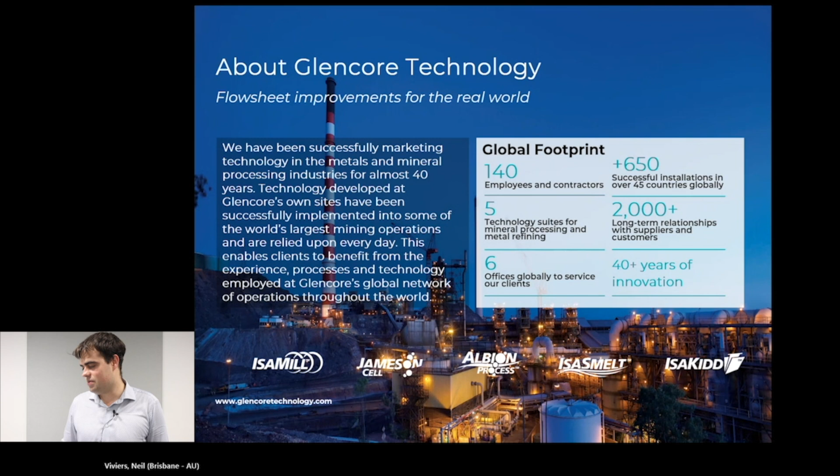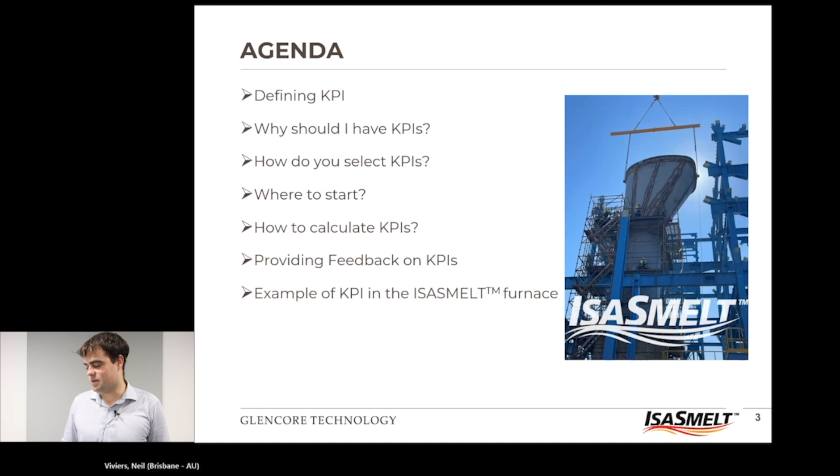Today's webinar, Smelting KPIs, forms part of the ISASMELT technology group. So the agenda for today: we'll delve straight back into basics, defining what a KPI is, why you should have KPIs, how you select these KPIs, where to start, how to calculate these KPIs, and providing feedback on these KPIs, which I think is probably one of the most important and overlooked parameters. We'll give you an example of KPIs in the ISASMELT furnace, and some recommendations and potential pitfalls, where we've seen clients use KPIs suboptimally or even incorrectly. We'll also be answering some questions at the end.

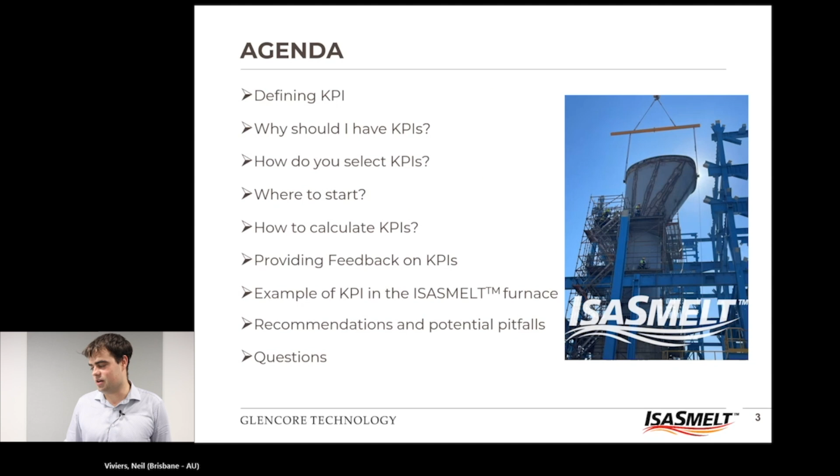You might see the picture here on my right-hand side. This is a picture of an ISASMELT shell for a furnace in Europe, which will start up at the end of the year. We're very excited about that project.

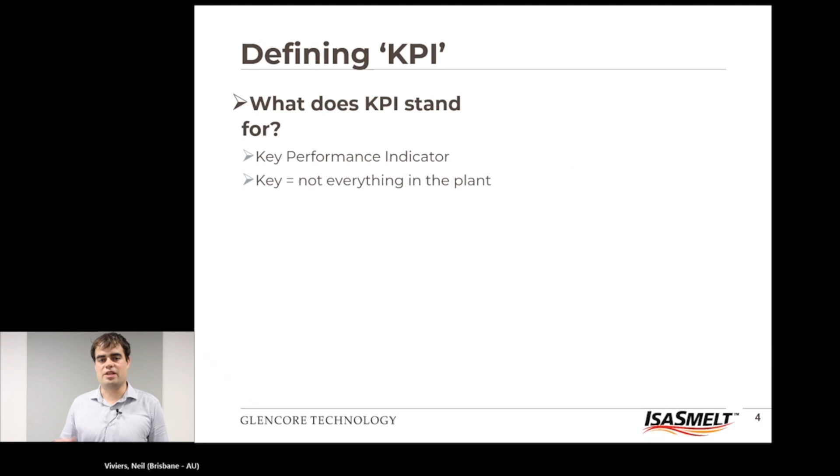All right, so back to basics: defining what KPI stands for. Let's break it down. KPI is Key Performance Indicator. So let's break the words down. Key means not everything in the plant - essentially, it's the key parameters which your plant cannot run without, or runs suboptimally with if they're not in specification. Performance is a certain area that is measured, be it process, safety, or cost. And then the word indicator, which to me is probably the most important word in this - an indicator is indicative of good or bad performance, but it's not an exact or direct measure, and that is very important.

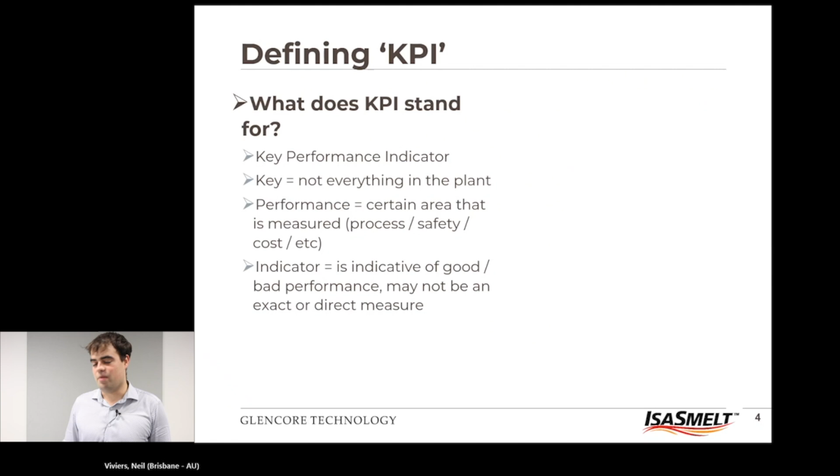To illustrate this, we'll give an example where steady feed grade is an indicator of steady matte grade. But obviously most of you know that you can't have a steady matte grade just with a homogeneous or steady feed - there are many other parameters which can also influence it, where steady feed grade is just one indicator.

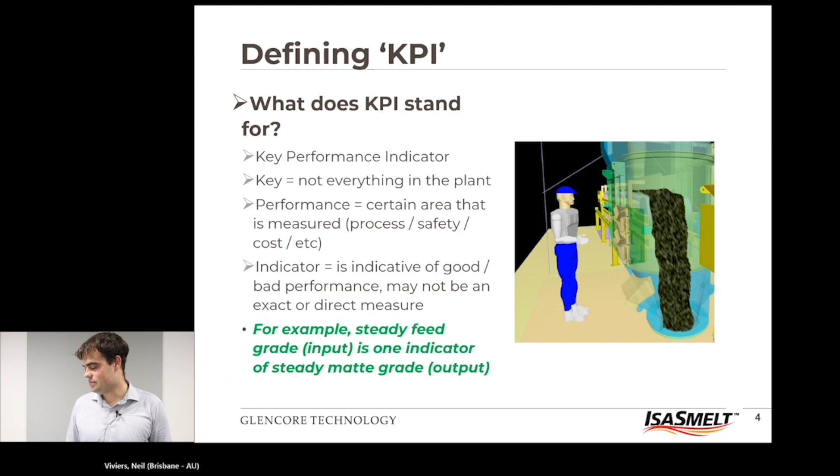So why should you have KPIs? There are certain indicators or data in the plant that give a good indication of the plant operation. However, this requires an in-depth understanding of the plant. For example, experienced metallurgists can come into the plant in the morning, look at a few data points and trends, and tell you the plant's running well, or that we need to look at this or that. Basically that takes a lot of experience, and KPIs can be used as a way to standardize this experience, to make sure everyone is aware of all these KPIs so the furnace can be run optimally at all times.

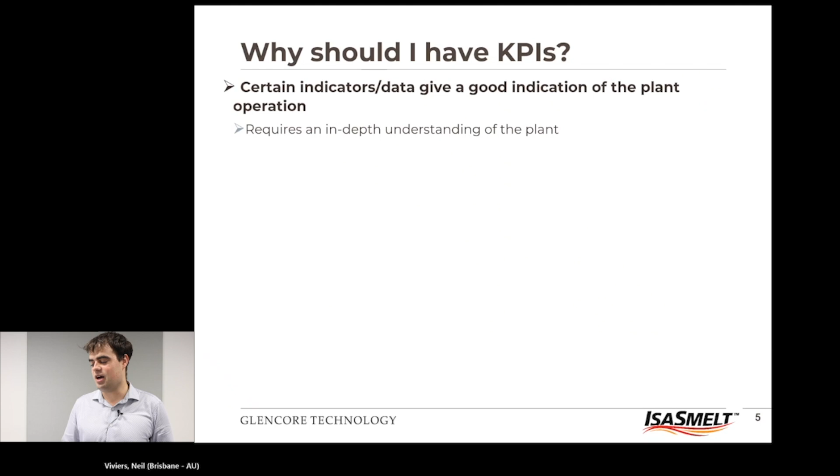These days your DCS systems probably have 100, 200, maybe even 1,000 data points all reporting to your central database, and you can't possibly use them all the time. So you need to prioritize the most important, or key, parameters, and if they're in specification first, you can look at the rest.

KPIs also drive accountability. What I mean by that is numbers are hard to argue with, and it's easy for people to understand. KPIs remove the ambiguity because it's a data-driven approach, which means it's not based on perception, but it's based on an actual number.

So, for example, your tapping floor operator might think the slag is too viscous, but if he's just basing that on his perception rather than some number, the metallurgist will struggle to help solve the issue. Instead, the metallurgist and the tapping floor operator might refer to the tapping time in the ISASMELT, where if the tapping time is too high, it probably means the slag is too viscous, and the metallurgist has some work to do.

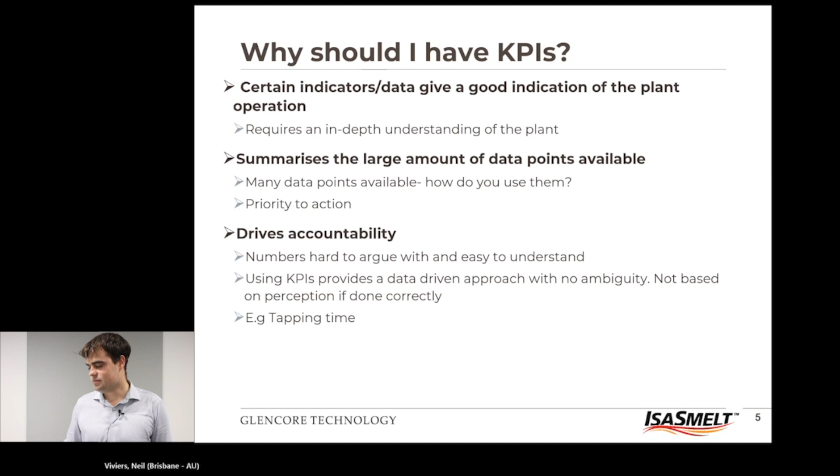KPIs can also be used to drive a data-driven approach to engage your stakeholders. For example, these days smelters can run quite lean crews, especially sometimes on maintenance. And as you know, things keep on breaking in the plant from time to time. So basically having KPIs can help you troubleshoot these issues optimally.

For example, if the metallurgist has shown that all my KPIs are green, meaning in spec, but there's this one KPI, my off-gas sensor gas concentration, that's in red, it could be a process issue, but it can also help you talk to your maintenance teams to say, guys, we need to go fix this issue because everything else is in spec. So it helps you solve the problem more efficiently.

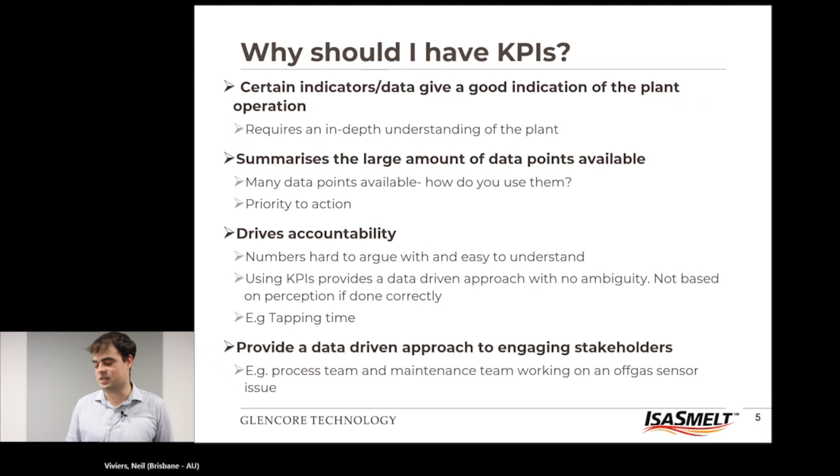So, selecting KPIs. Before we select them, let's give you some characteristics of good KPIs. Good KPIs are understood by everyone, from your tapping floor operator to your general manager in the plant.

Targets are stretched but still achievable. This is really important. For example, if you have a KPI where the target is 5 and the normal range is from 3 to 6, there's no point having the upper and lower control limit from 0 to 10. Why? Because your KPI will always be in specification, and if it's always green, people will start not caring about your KPI and it'll become meaningless.

It's also good if your targets are stretched, as that drives innovation and operational excellence. For example, let's say you've narrowed down your lower and upper control limit, and then in a few months' time you might be able to narrow it down further and further. That can increase productivity and allow you to get more from your smelter operation.

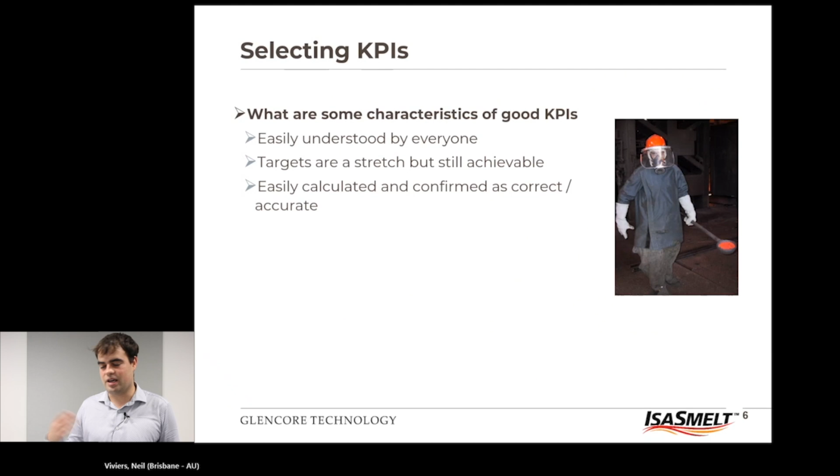Your KPI should be easily calculated and confirmed as correct. As a weird example, you shouldn't be calculating a KPI on a Tuesday different to a Thursday, and you shouldn't one week decide this is how you calculate it, and the next week calculate it differently. It should be consistent. Consistency drives people to buy into your ideas.

It's also important that KPIs drive the right behavior. So, probably a bad KPI, but just to illustrate the example: if you tell your tapping floor operators, I need 12 samples in your 12-hour shift, that's very badly defined, because then they might take 5 samples in the first hour, 4 in the next hour, and the rest in the last hour. Your KPI should rather be take 1 sample every hour, which will promote driving the right behavior.

It's also useful if several items are captured in one KPI, especially at higher levels in your organization. So basically your tapping time can be used to infer whether you have temperature fluctuations, if your furnace is too hot or too cold, and it can also give you insight into viscosity and perhaps even chemistry, and what might need to change.

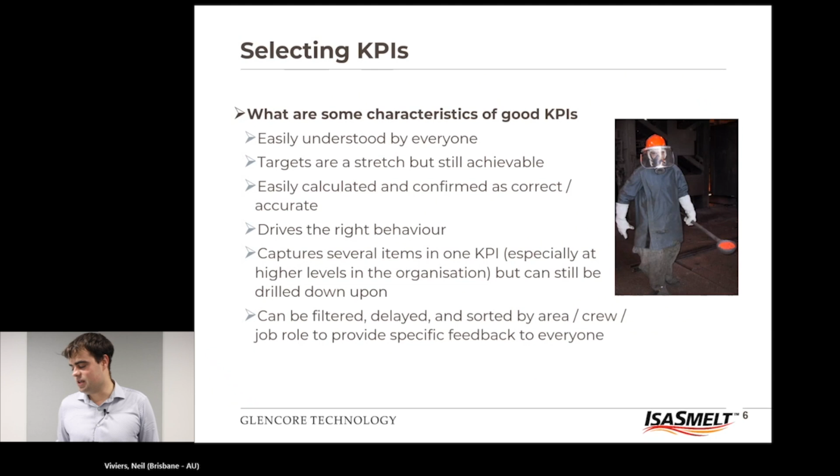It's important that your KPIs can be filtered, delayed, and sorted by crew or area or job role, and that is to be able to give specific feedback to your crews.

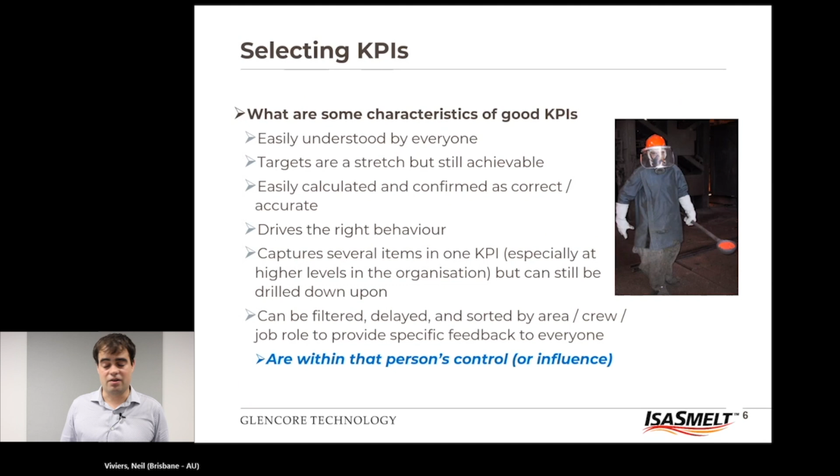I highlighted this in blue because I think it's very important: it's crucial that the KPIs are within the person's control or influence. So again, a tapping floor operator—there's no point in having his KPI be the amount of acid that your acid plant produces, because he has no direct influence over that. If that is his KPI, he will not have buy-in, and he'll feel there's no point in having this KPI, and he might not do the job as well as he can.

So where do you start? Well, it's important to have a solid understanding of the plant or process, and that means understanding the inferred meaning around instrumentation or data.

As artificial intelligence and large language models come into it, that's very important. I heard a story of a consulting firm trying to build an AI model to highlight what KPIs a smelter and acid plant should run at to run optimally. On the first pass, this AI model came up with: if the plant produces more acid, the furnace will run better. Obviously, that doesn't make sense - if your furnace runs well, you produce more sulfuric acid. That's an obvious example, but it illustrates that you need a solid understanding, and you can't make relationships without understanding what's actually behind these KPIs.

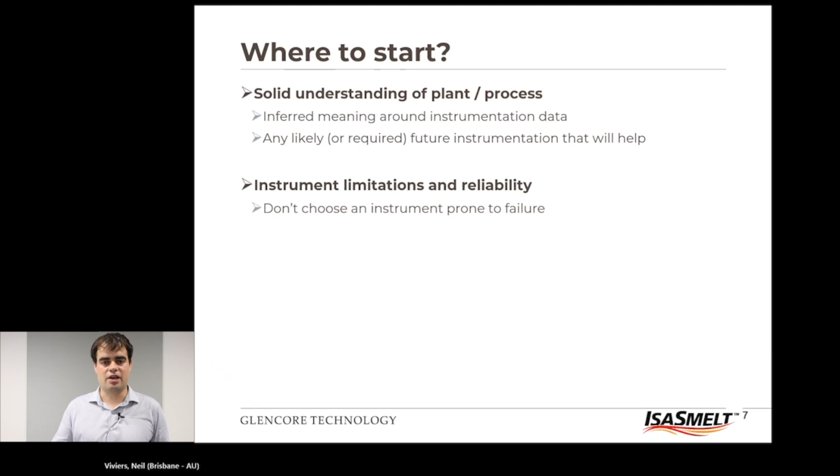Understand your instrument limitations and their reliability. Don't choose an instrument that's prone to failure. For example, if you choose a temperature thermocouple as your KPI - on Monday it's green, in specification. On Tuesday, that instrument fails, so it gets fixed. On Wednesday, it's red, out of spec. Then it's like, well, is the instrument fixed? Is it working or not? You immediately lose credibility in your KPIs if you do that.

It's also important to understand the measuring frequency of your instruments. To give an example, think of your off-gas instrumentation - some of these instruments take an online sample of your gas and give you a result after a few minutes. If that's the case, there's no point measuring this instrument every 1 or 2 minutes for your KPIs, because it won't change. So understand your frequency of measurement.

It's also important to understand the range and sensitivity of the instruments, and this might lead you to think maybe I need a new sensor here, or a sensor with a bigger range. For example, there's no point having your KPI at the upper or lower limit of your instrument range, because then it could flatline and you think, oh great, I'm in spec, or I'm out of spec, but actually you're just out of range of the instrument.

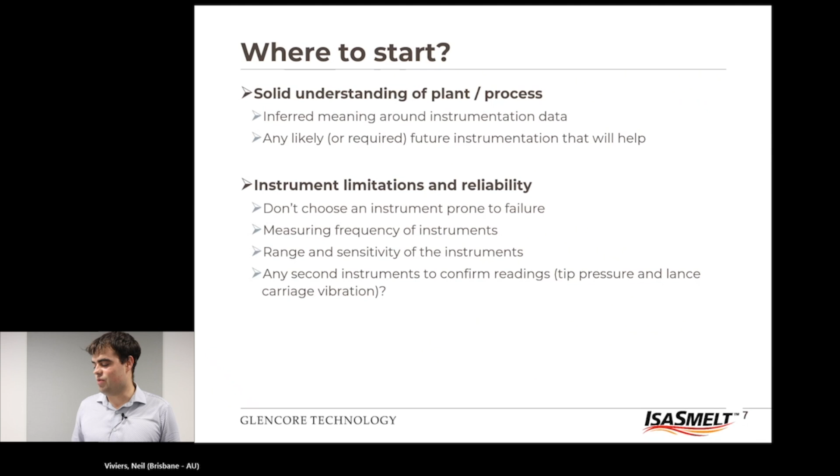It's also quite useful to have second instruments to confirm your readings. For example, in the ISASMELT, you could use your tip pressure and lance carriage vibration to indicate lance immersion. If your lance is deep in the bath, your tip pressure is high and your lance carriage is vibrating, it probably indicates your lance is too deep in the bath. But say your tip pressure is very high, but your lance carriage vibration sensor shows no vibration, and physically you can't see any vibration - that probably means there's something wrong with your tip pressure. By doing that, you build more credibility in your KPIs, because people will know the tip pressure reading is broken, and this is a way for you to verify that and show it in your KPIs.

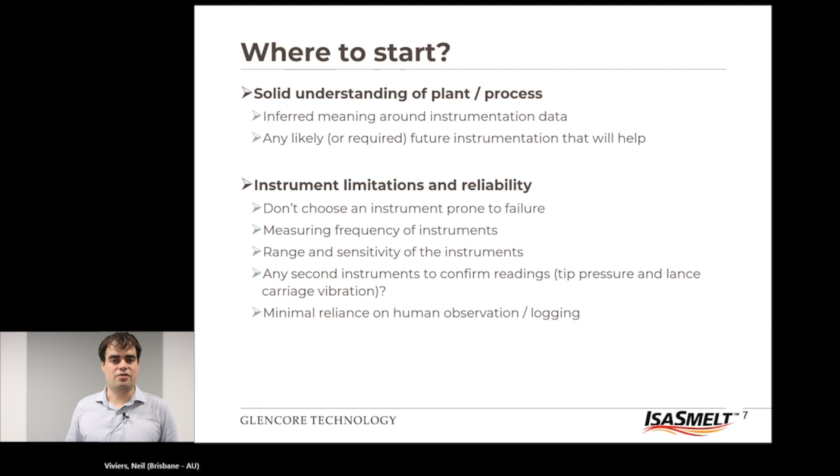It's also important to have minimal reliance on human observation or logging, so that just makes the process more open, fair, and transparent to all individuals involved.

So, calculating your KPIs - larger organizations might have access to a PI system or interface, which is very useful and can calculate your KPIs automatically. I've also seen Microsoft Power BI used as the graphical user interface, which looks quite nice. So if you use a PI system or similar - you load up this dashboard in the morning and it automatically calculates, giving you a very nice set of looking KPIs. For smaller organizations that don't have access to PI, you might have to use your DCS, grab some Excel graphs or something similar, but that can also work quite nicely.

As a side note, this sort of mirrors daily checklists, but you can also use your site procurement register. If you're suddenly using more thermocouples, more Cermets, or more oxylances, it could indicate something wrong in your process, and having that data can tell you quite effectively. Again, it's important to understand your data and how it is collected.

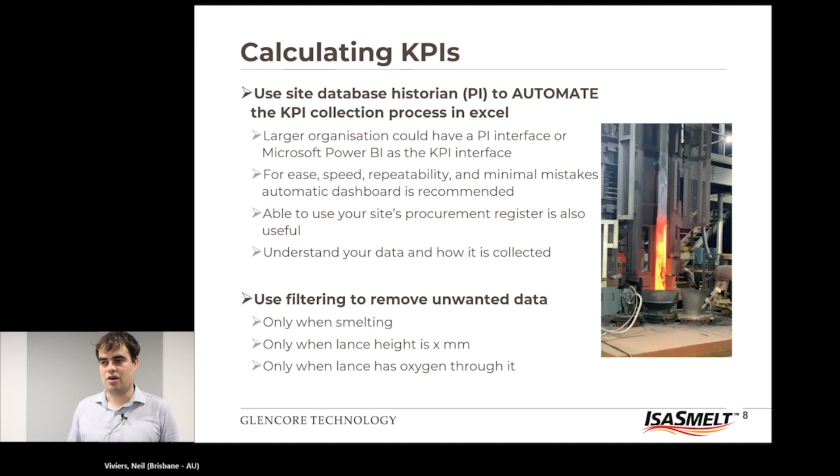Use filtering to remove unwanted data. You typically want your KPIs only running, showing, or calculating when your furnace is smelting or operating, because variables are in a different state when smelting versus not. To do that, you can filter, for example, when the lance height is below a certain value, or if oxygen enrichment is running through the lance, just to mention a few examples.

Selecting time periods that match up with your crew shifts makes it easy to collate by crew and review the last week, month, or year's performance. You can also see how different crews operate.

I've had past experience with this, where we had four shifts and we heat mapped the way they ran their different parameters - things like temperature and how they control the chemistry in the furnace. We mapped it on a heat map and could see differences between the shifts. At the end of the day, the operators are running the same furnace, so ideally the heat map should be fairly concentrated. But we saw differences, and we started talking about it - understanding this crew's doing that, that crew's doing this, one struggling with a topic, another struggling with something else. Having that data open and allowing people to talk about it enhanced the smelter operation quite a bit, and we actually solved some issues and increased our productivity.

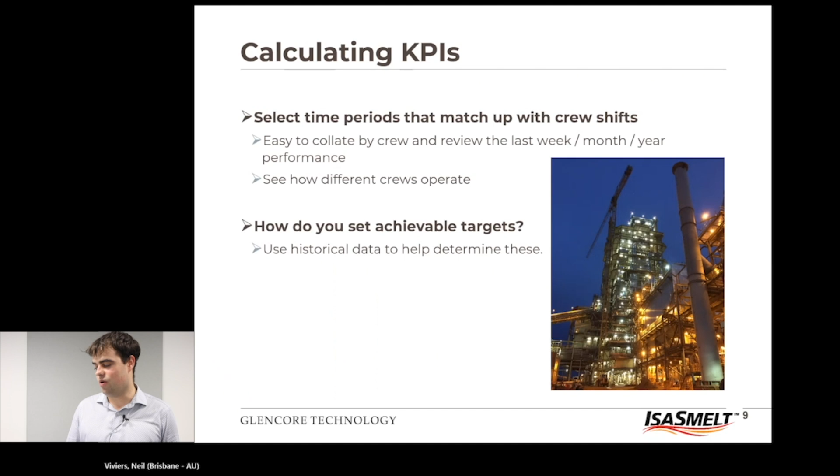So now you know how to calculate your KPIs. How do you set achievable targets? In a new furnace, you might use your design documentation to set your limits, and that can work. But if you've been operating your furnace for a while, it makes sense to use historical data to help determine where your lower and upper control limits should be.

How do you do that? You would pick the operating times where you've been running optimally in the plant, or in a certain area of the plant, and you know that's the limit of this KPI or that variable, and that's when the furnace is running the best way possible.

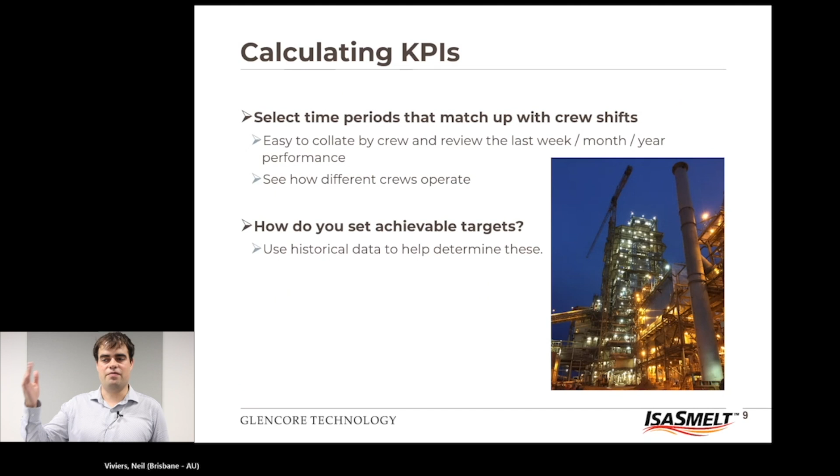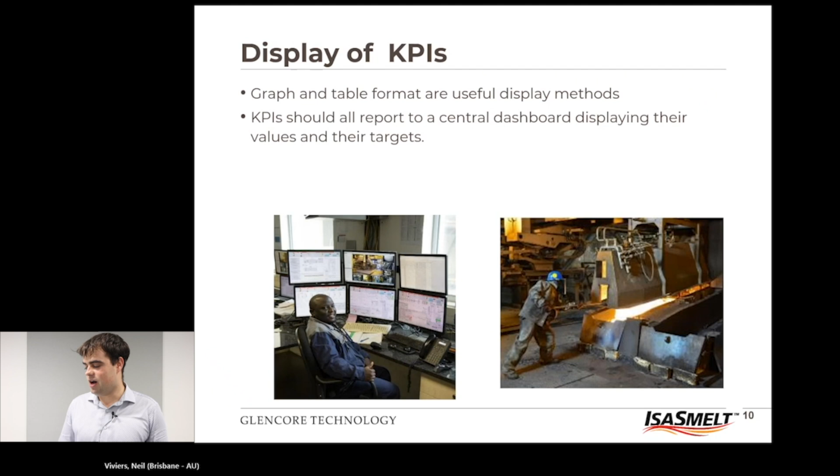For displaying the KPIs, I prefer a graph and table format as useful display methods. The KPIs should report to a central dashboard, displaying their values and targets. Color coding is recommended - it makes it easy to see what's in spec and what's out of spec, making it more user friendly. I prefer, and it's up to your organization, but if you can go to your dashboard in a morning meeting, it can be used to drive actions in the meeting.

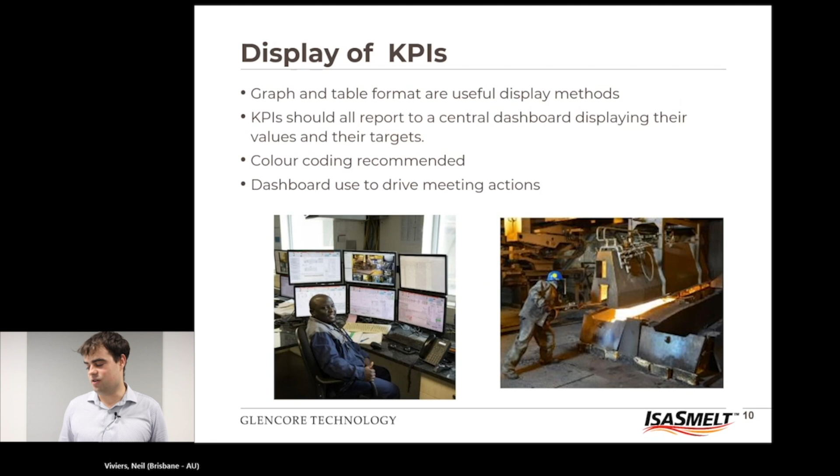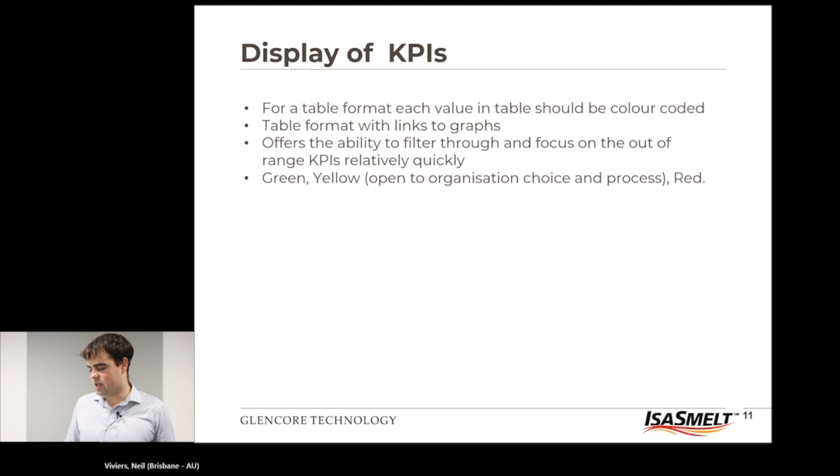For the table format, you have a table of all your KPIs with links to your graphs. I like the table format because if they're color coded, it allows you the ability to easily see what's in spec and what's out of spec. It just makes it easy for the eye to look at, and how you color code it is open to the organization.

For example, if your KPI is red, it means it's out of limits and you need to address that as soon as possible. Yellow could mean your KPI is deviating close to its limits or out of its limits - you need to investigate that after you've solved your red KPIs; it could be a leading indicator of something. Your green KPIs are in range and typically no real action is required.

I've seen some organizations not use the yellow, amber, or warning status in their KPIs. They believe things are either right or wrong, red or green. For me, that's why I put the traffic light example there.

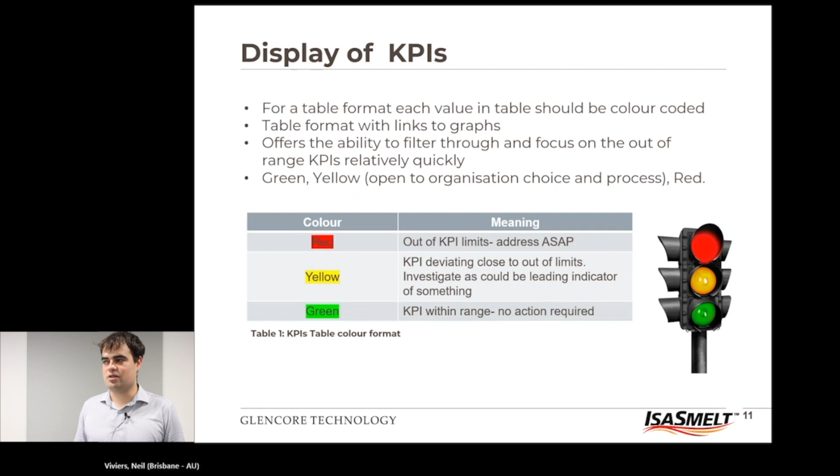If you imagine you're driving on a highway and suddenly the traffic light hits red, you have to stop - it's panic, it's not well planned, and that creates chaos. I think the same is relevant to your KPIs. You want a warning to know, I've had these red KPIs, I'll solve them first, but these are next, and if I don't solve them now, they will become red. So it prevents not solving anything and then suddenly having to deal with the issue.

So this table gives you an example of the KPI output. Just to explain it: I've got my parameter, UOM is my unit of measure, LCL is lower control limit, UCL is upper control limit, actions and comments, the target, and then the daily KPI average, weekly, and monthly. Daily is typically 24 hours, but you can also do a shiftly one, weekly every 7 days, and monthly. For me, I prefer a rolling 30 days. Other organizations, especially for more production-geared KPIs, might use a month to date.

The reason I like the daily, weekly, and monthly is because it can show some trends in a table format, which can be quite useful. As an example, off-gas pressure at negative 60 pascals, negative 65 for the week, negative 65 for the day - that's okay. But if it was negative 60, negative 70, and negative 80 on your daily, that indicates I might be having a blockage in my off-gas smelter. You can tell that just by looking at this table, which is quite user-friendly.

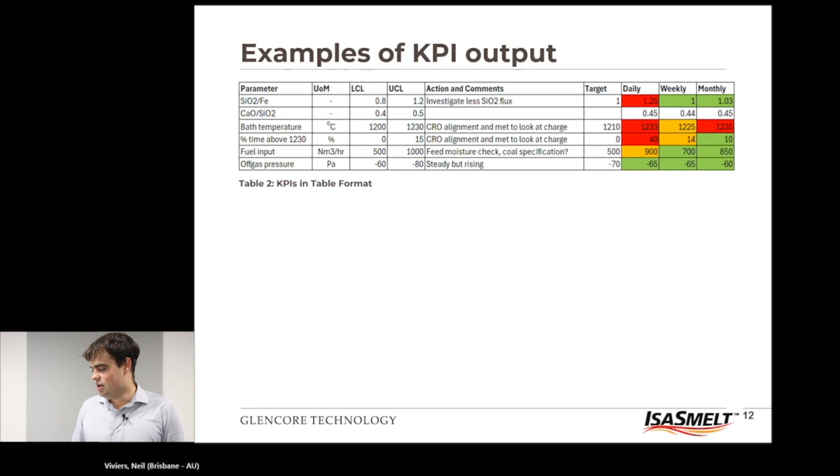For example, you can see your bath temperature is 1233 for the daily average, so it's out of range. On the table, you might instinctively think the furnace ran too hot for the whole day. So ideally what you want to do is click on your 1233, and it opens up a graph showing your daily average temperature, lower control limit, and upper control limit over the 24 hours. This gives you more information - you can see the day shift ran the furnace quite nicely, and there was an issue during night shift. It's not to blame anyone, but to be able to solve the problem - what changed from day shift to night shift that now suddenly we have temperature issues?

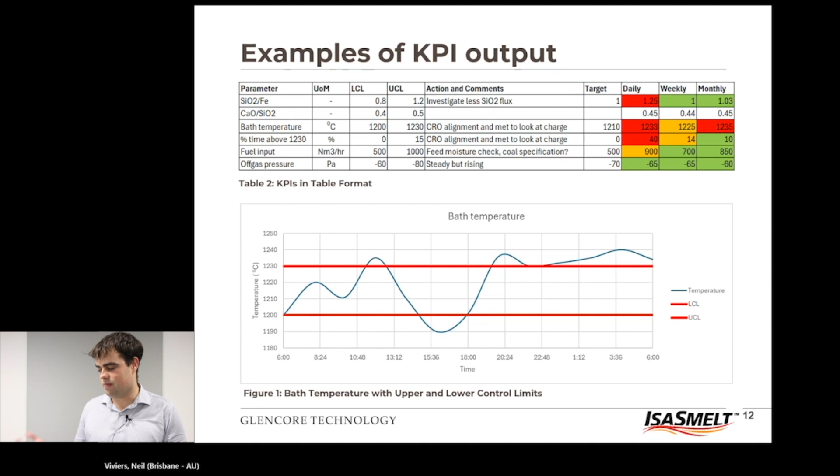Giving KPI feedback - before you can give feedback, it's important that people actually understand what each KPI means and why they need to follow it. It's important to give regular and consistent feedback as well.

It depends on the organization, but email your daily KPIs to your stakeholders with comments and actions required. That shows you're monitoring these KPIs and being consistent about it, and promotes openness and buy-in into these KPIs. Also, people respond to consistent dialogue and monitoring.

It's important to make sure your KPIs are accurate and reliable. Try not to make a mistake in your calculation of your KPIs, or be open to it if you have, and solve the issue. It's also important to check your log sheets for operator comments and take these into consideration along with your KPIs - there might be a reason why something is deviating.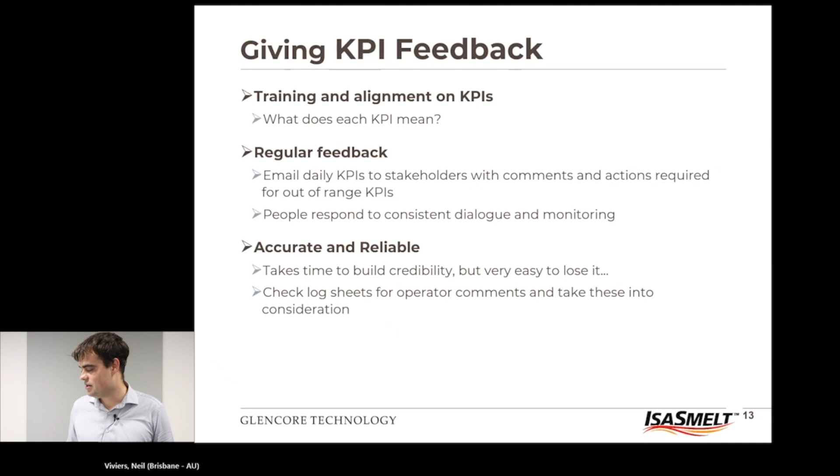As mentioned previously, use two sources of instrumentation data where possible to verify your KPIs, to make sure there hasn't just been an instrument failure. Another example would be an average bin level in your feed preparation plant versus a crude mass balance of how much you ran for the day - that can give you an idea of whether you're in the ballpark.

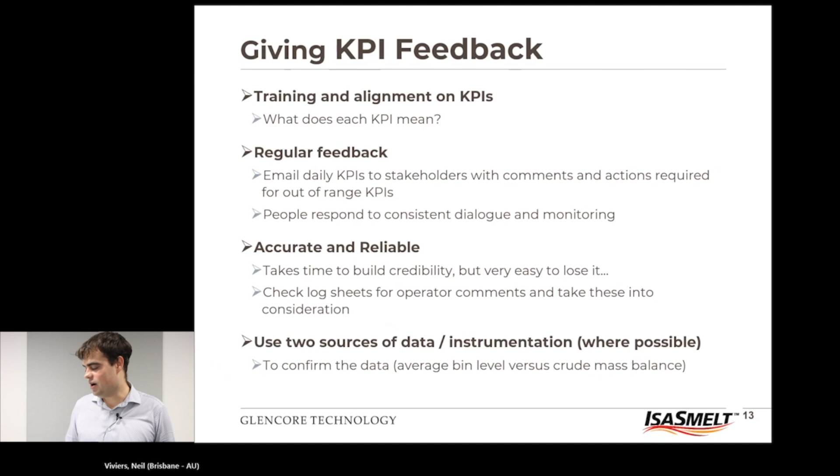So for example, your CRO, well his KPI is the instantaneous bath temperature tapping. Bath temperature set point should be in auto. His controllables are basically just to put this in auto, and some organizations might allow him to change the oxygen enrichment as well. And his indicators, even if he's done all of this, is that the tapping set point is not working, or there's some charge or feed mix issues, or some bin delivery issues, sort of a bin holding up or something similar.

So your shift coach, he's sort of responsible for his CRO's actions. So he'd be monitoring the average temperature of his crew for the day or for the week. His controllables are basically to get his mixing plant operators to go and check are there any bin hang-ups, is there some contamination, this feed looks a bit different to that one. And he'd raise it in the shift notes, and then the metallurgist would also assist in solving this.

So the Mets would basically look at the daily and average temperature. Their controllables could be the charge or feed mix, and again it's very open to the organization and what you're smelting.

So for example, some organizations change their feed quite frequently. So if the slag is too viscous, or there's a reason the control operator might be running the furnace a bit hotter because your percentage solids in your charge might have changed, and we might have to change the chemistry, change the fluxing, or depending on the organization, maybe change your temperature target slightly.

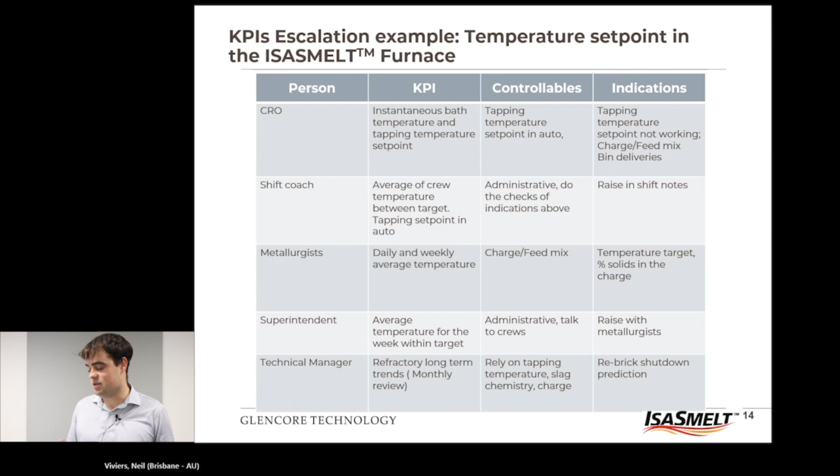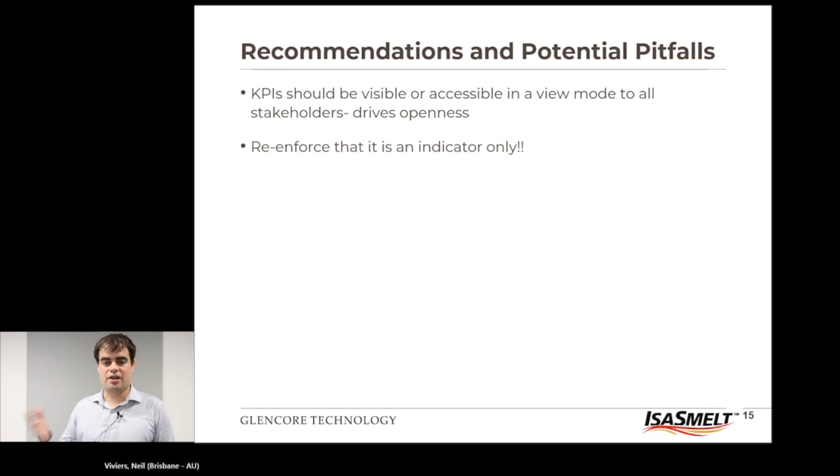So recommendations and potential pitfalls. The KPI should be visible or accessible in a view mode to all stakeholders. This just drives the openness of the whole process. You have to reinforce that it's an indicator only. The KPIs aren't going to tell you how to run the furnace. They're just going to indicate to you that something is wrong here, something is deviating.

It's important to have a logbook of the reason behind every KPI, and that's so everyone understands the KPI and why it is chosen. Especially in organizations that have high turnover, it's important that every new person coming in understands why this KPI is here. Some strange examples, but for example, if someone's KPI is to monitor the cooling water flows and the temperatures, and well, they see the KPIs are in spec, the thermocouple is reading 25 degrees, it's okay, but the pipes feel quite hot or something, there needs to be some understanding that there's probably an issue, this instrument might just be broken.

So, don't just blindly follow your KPIs, make sure you understand why you have that KPI. We talked about it a bit, but aim to incorporate your KPIs into each other. Don't add another KPI to your list just because something happened once. Only add something if it adds value, and maybe even have a sign-off procedure to say we want to add this KPI and these are the reasons for it.

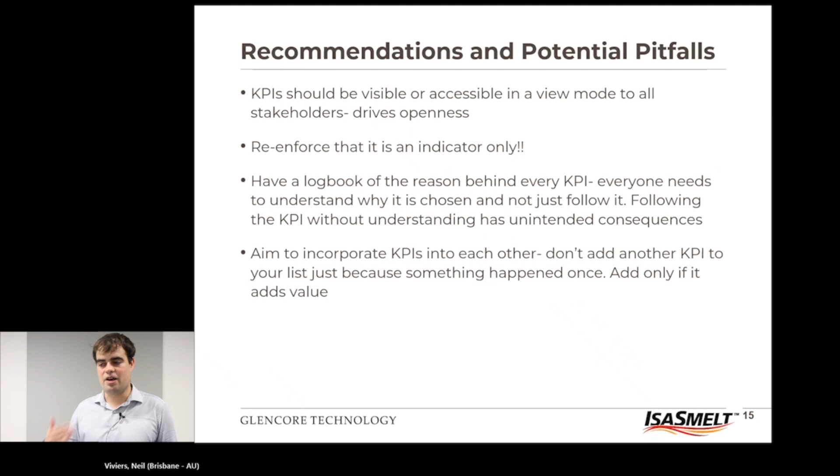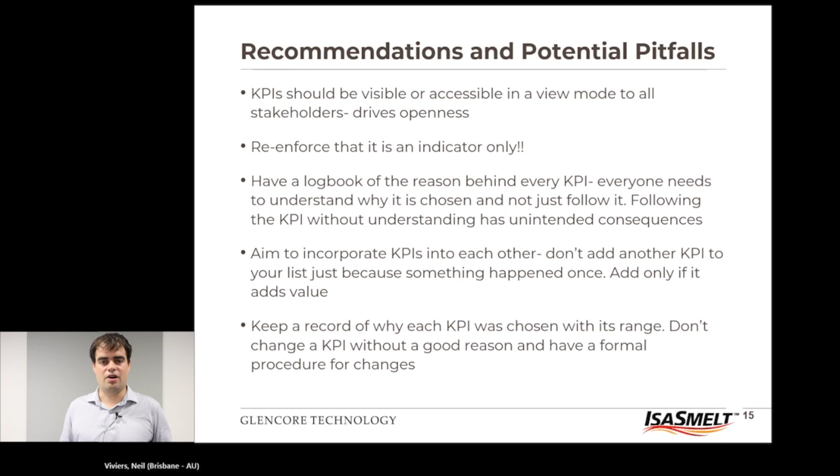Keep a record of why each KPI was chosen, and why the chosen range is there. This is so that if a new person comes in, they know exactly why it was chosen. A KPI could have been selected 5 years ago, and now it's no longer even an issue. So you think, but why is it even there? And there might be a very good reason for it. So just be aware of that.

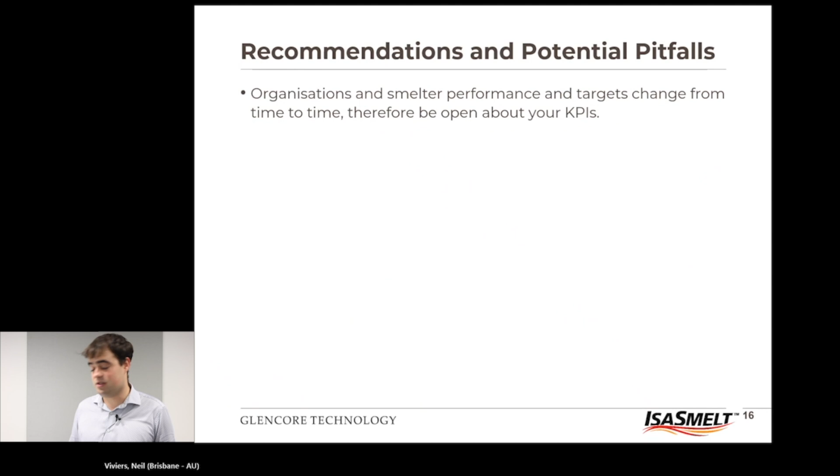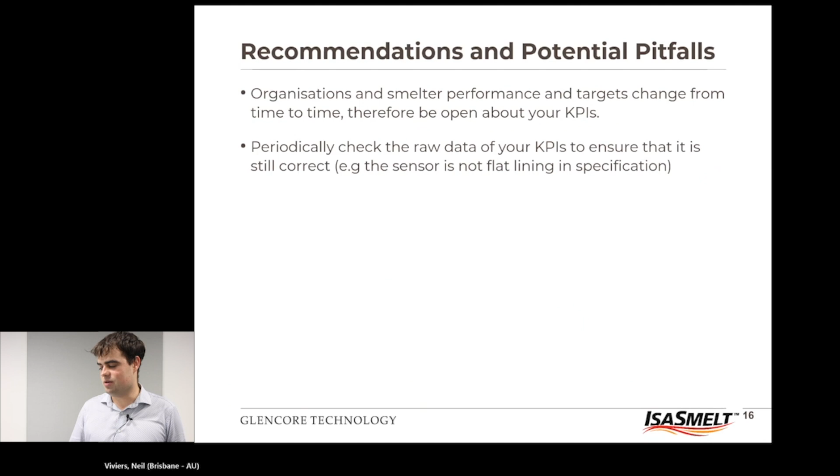Organization smelter performance can change from time to time. You could be running some nice concentrates, then get into more complex concentrates, becoming a toll smelter. Be open to your KPIs and be open to changing them from time to time if you need to. It's important to periodically check your raw data, especially those KPIs that are in spec most of the time. Just make sure nothing is flatlined. Look at your graphs, look at the raw data.

Just make sure everything's still reporting to your central database, to negate any mistakes. External or non-process KPIs are quite useful. This delves into what a daily metallurgical checklist is. Just monitor some orders from stores. If you're suddenly ordering more oxy lances or more bath ceramics, there could be an issue, and that can tell you more about your process.

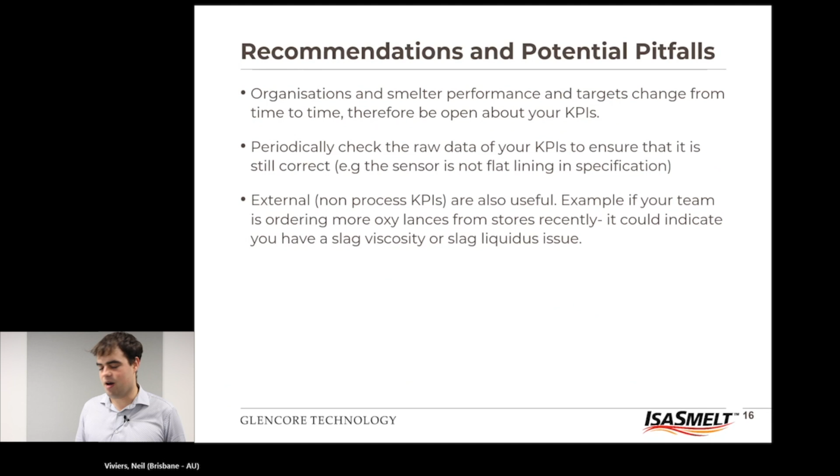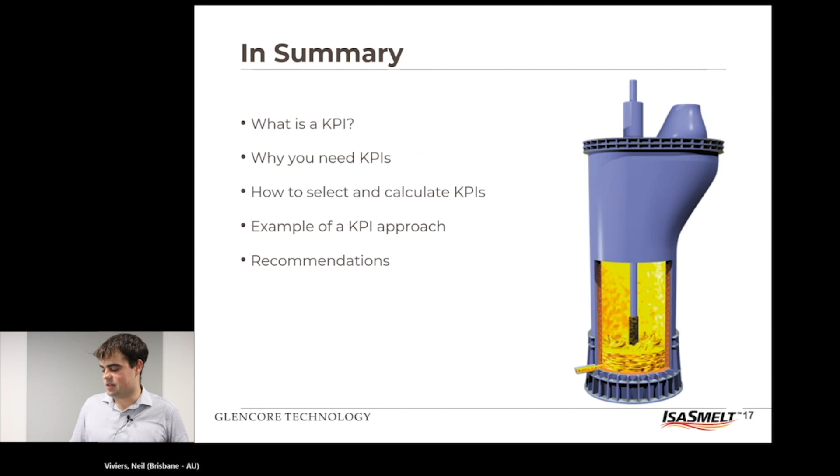So in summary, we defined what a KPI is, why you need KPIs, how do you select these KPIs. We gave an example of a KPI approach, gave some recommendations, and we'll answer some questions at the end. Thank you.

Thanks, Neil, that was a great webinar. I learned some new things and hope others did too. Good refresher as well, because I haven't been on a running smelter for a couple of years, 24/7, so some of these things are always good to have a refresher on.

We've had a few questions from the audience, and we've only got time to go through three. The first one is about KPIs and how organizations choose them. Some organizations may choose to have many KPIs which blur the line between KPIs and checklists, and how is this managed? I guess we can relate this to smelters. I've been to one where the manager decided every single measured thing became a KPI, and then everyone was running around trying to check off all the little KPIs that were now there.

So in these situations, how is this managed and how do we fix blurring these lines? That's a good question. Like you said, some organizations, especially under high production pressures, don't want the furnace to stop. You have your major KPIs, and then one thing happens and suddenly we make that a KPI too. Have a downtime event because of this, you make that a KPI. Essentially then you have major KPIs and minor KPIs, and they all come together. It might work for the first week or month, and then instead of focusing only on your major things or prioritizing them, you start focusing on your minor KPIs. Eventually you'll get caught out. You can't focus on all these things at the same time. One of your major KPIs will slip, and you'll have some unplanned downtime or out-of-spec product.